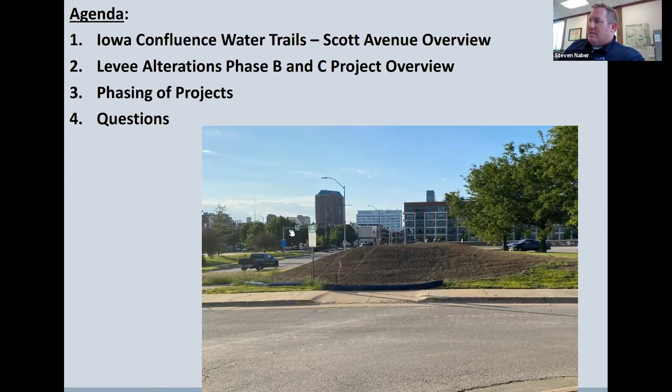So how do we do all this? I just threw a lot at you here, but first, let's go to one real quick: the Iowa Confluence Water Trails Scott Avenue project. You may have heard about this in the news. This project does a number of things. One, it's providing an incredible recreational feature in the river, and also it's modifying the dam by notching the dam, and making some improvements just downstream of the dam to control the drop, essentially, so that there's not that vortex feature. And that's the problem with the dams.

When the water goes over the dam, it creates almost a rolling effect, kind of like a washing machine type effect, where the water just spins in a vortex manner. And so this will eliminate that hazard, and instead of just the river dropping at the dam, there'll be multiple drops. You can see them on here: drop 1, drop 2, and also create a recreational type course for river users, kayaks and whatnot, and also improving it for fish habitat, creating a fish passage to go upstream as well.

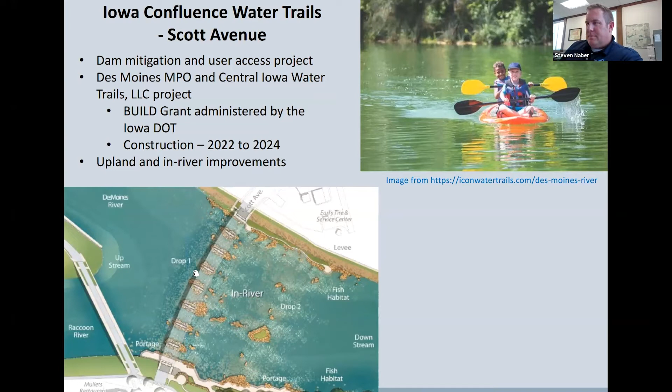And you can see in the picture in the lower left there, also some improvements along the bank, portage locations to get into the river and out of the river, as well as some fishing pier locations. Here's some of the construction drawings that are being done. Again, we talked about the fish passage, the boat passages and the drops as well.

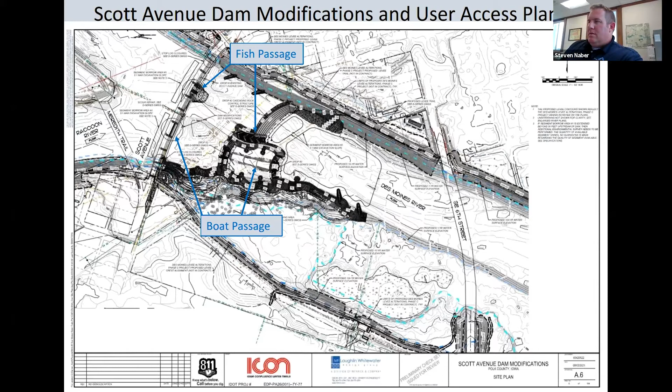And here's kind of a rendering graphic showing that. The Iowa Confluence Water Trails has created a website, iconwatertrails.com, if you'd like to find out more. So again, that's a quick overview of what the project is. So again, mitigating the dam risk and then also providing the recreational feature.

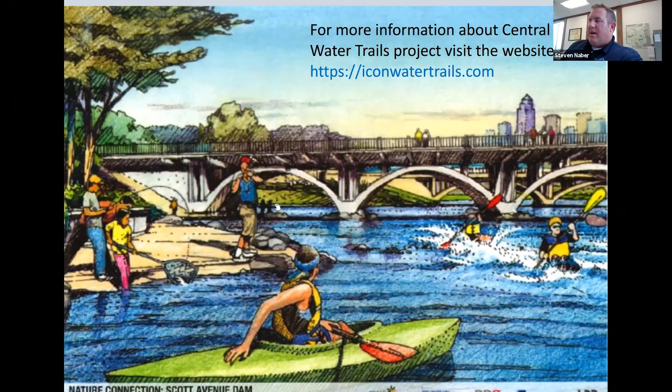And I talked about all the needs for the flood protection system, the levee system, right? So this is a big project. This map actually shows in color where the downtown levees are. And so you can see there's multiple levees. They're on each side of the river. And phase A, so we've broken it out into phases because it's a massive project. Phase A has already been under construction. That's well along the way.

That included the Simon Estes Amphitheater. If you're familiar with the Simon Estes Amphitheater, the back walls, those seat walls, that is a flood wall actually. And so we've raised those to meet the FEMA standard. And then we've also done what we know as closure improvements, where if you notice, there's walkways between the seat walls, right? To get down to the concerts and Nightfall on the River. And those walkways are openings, right?

So we also have openings or closures, what we call them, at the railroad tracks or at roadway bridges, right? Because the levee's up here, but then we come down to where the road is or where the railroad tracks are. So those are what we call closures. If there was ever a high water event at certain stages, we actually have to come and close those openings. So the areas between the seat walls, we put in notches to create stop logs and close those openings. And that's the case also for roadways. Even the picture I showed you earlier with Principal Park, we'd have to close over the entranceway to the parking lot between the levee opening there.

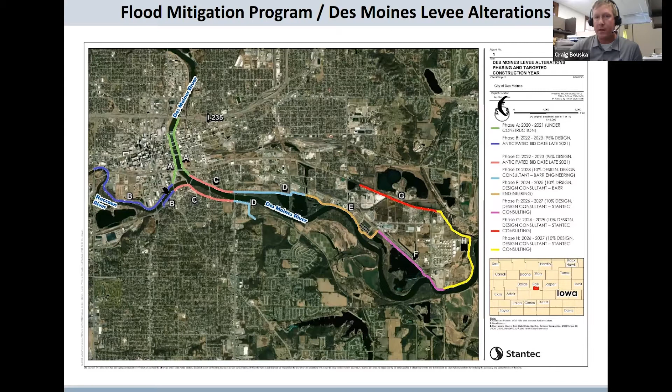Some of the improvements with the Phase B project, which would be from Southwest 3rd Street upstream to Martin Luther King Jr. Parkway, include earthen levee raises, flood wall raises and replacement, bank armoring with riprap, and also gate well modifications, as well as abandoning old utility penetrations that create a pathway for water to get through and potentially cause issues with the levees themselves.

So the next slide shows the entire scope of the Phase B project, which we plan to start construction on in 2022. It's really broken out into 3 phases. The first phase is from Southwest 3rd Street to Southwest 7th Street, basically on both sides of the river.

And this is going to be an impactful phase too, because it involves closure of the Meredith Trail for approximately a 3 to 4 month duration. This will be the first phase of the project. When this work happens, right away in the spring of 2022, trail users will have to detour to Martin Luther King Jr. Parkway. The nice part about this phase, though, is it is shorter in duration.

Then as we proceed upstream with our work, starting in the summer of 2022, the area shown there in purple, as well as the orange section, will pretty much exclusively be earthen levee raises and stuff like that.

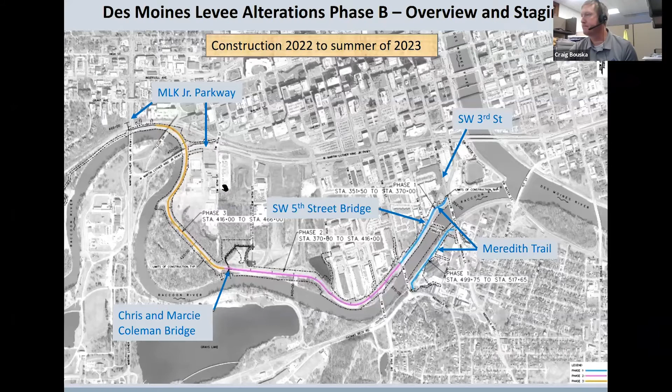Okay, any other questions? Jim? No. How about now? There you go.

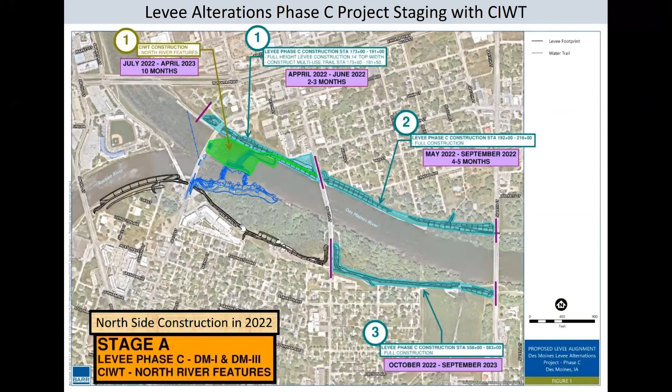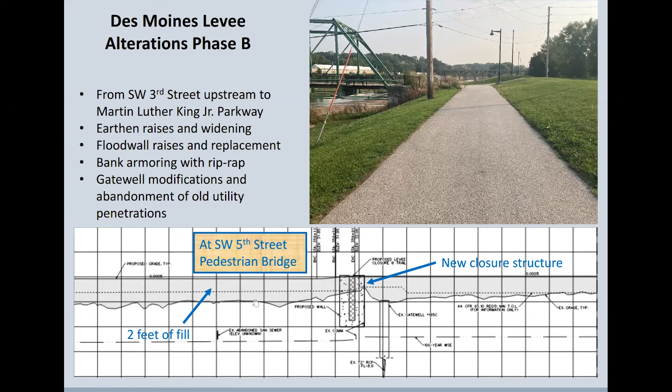Yep. Okay. So when you had that last elevation slide up, according to the river gauge, the south side at East 6th, it says the levee height is like 36.9 or something at the East 6th Street river gauge. Can you go to the one between East 6th and Scott? This one right here. When you look at that on the left side, is that the river gauge level? Clear to the left, the scale.

Craig, do you remember? We don't have chat. It says, according to rivergauges.com, the National Weather Service, the top of the levee now is, of course, I don't know where they're actually measuring that. Right here, we're showing the Des Moines datum. This is showing the existing levee at about 24. When you go to the bridge, it jumps way up here. And then we need to fill here a little over 2 feet, and then 4 feet when you get close to the bridge, because the levee kind of dips down.

Right. That's a good question. I think on the river gauges, it mentions 24 feet is where the city starts doing protocols for flood mitigation. Closing gates. Yeah. As you look down on the National Weather Service site for that gauge, it'll tell you the height of Simon Estes Amphitheater and when certain road closures happen. But I'm sure it says the levee height is 36 feet. So that's why I was questioning what those numbers on the left for that scale are. Is that the river gauge height or some surveying height that you've come up with?

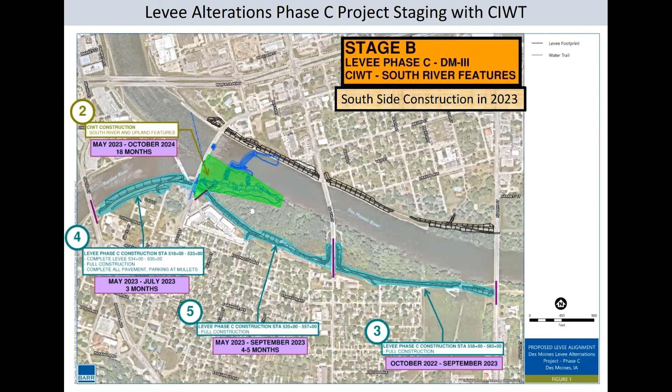Steve, you mentioned, if a neighbor that didn't see this asks me about it, will this be on the city's website somewhere? Yep. We'll actually post it on the projects and studies location, and a link to it. It'll take us a day or two, just because of the size of the video, but Jim, is that something you'd like us to email to you, that link? Would that help? Well, it probably wouldn't hurt. Okay.

If you go to our engineering projects and studies page, you see there's a whole bunch of different projects here, the Des Moines Levee alterations. We will post the video, and there's other information on that website as well, kind of schedule and stuff like that, so they don't have to watch the video for some information. So again, you go to the city website, dsm.city, then the engineering page, projects and studies, and then Des Moines Levee alterations. And you can see there's other projects there that you're probably all familiar with. Fleur Drive, Second Avenue corridor.